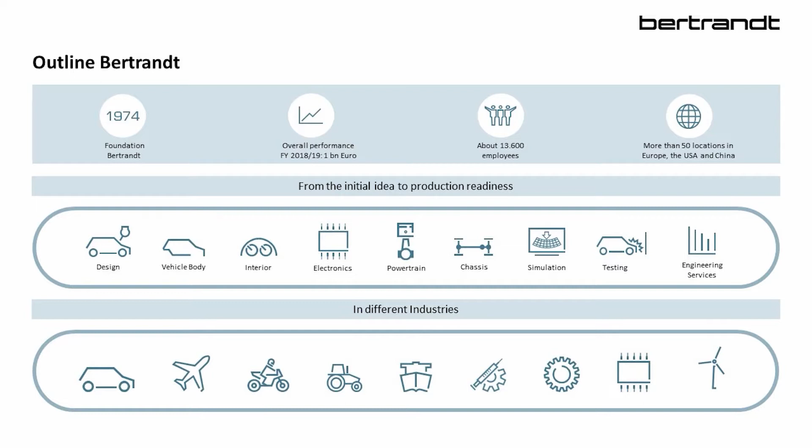And we are operating with sophisticated technologies of present and future, as you can see on our presentation slide, in different areas of the automotive, but not only the automotive industry. With our headquarters located in Ehningen, Germany, near the Stuttgart area, our more than 13,000 employees support our clients internationally from more than 50 locations in Europe, US, and China.

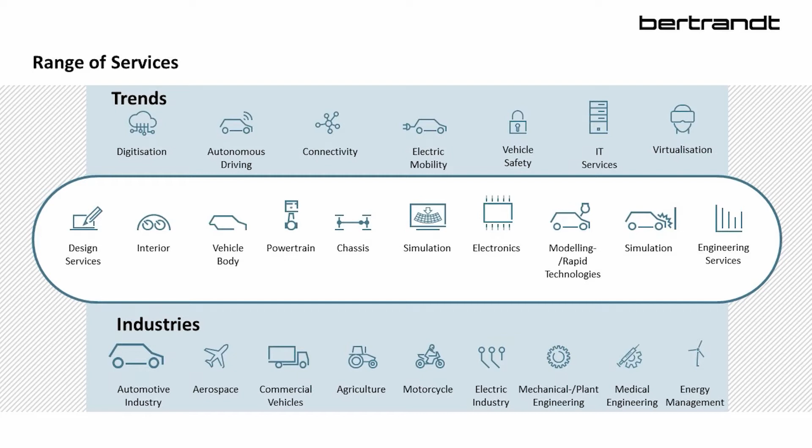We are facing increasing demands. Fewer individual projects are being awarded. There's an increasing need for development solutions along the entire automotive value chain. Development partners are expected to work on new mobility concepts for the future and to provide corresponding support for customers in their business models. We as Bertrandt accompany our clients with competence along the entire product development process in multiple domains, industries and disciplines. We identified 4 major trends that are relevant to our clients. Digitalization, autonomous driving, connectivity, and electric mobility are the megatrends that dominate the market.

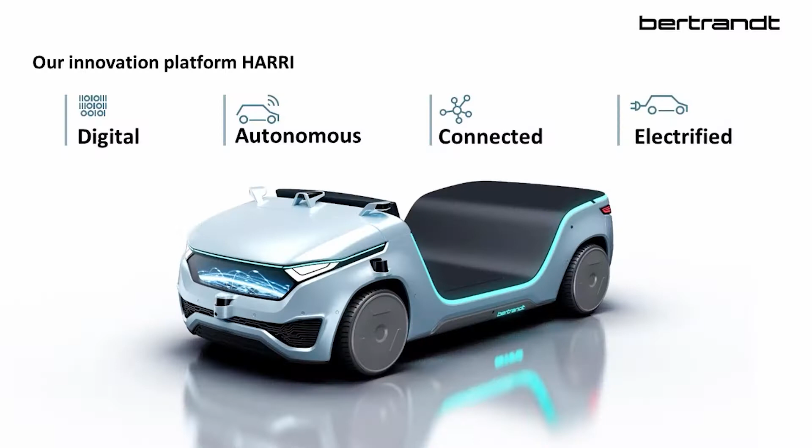As such, we wanted to find our own solution combining these major topics and invented our own development and innovation platform, HARRI. HARRI was built with a major statement in mind. Each trend on its own is an enormous challenge. The art is about mastering all 4 trends as well as linking the resulting functionalities. Thus, our innovation platform HARRI is based on holistic and interdisciplinary cooperation with participation of global branches and disciplines.

With developing HARRI, our aim was to showcase the bandwidth of our technology expertise. This does not only include the automotive industry but many other sectors as well. In this innovative technology demonstrator, Bertrandt brings together the complex interrelationships between individual divisions implemented through intelligent solutions. But let HARRI speak for itself.

I am the Intelligent Autonomous Innovation Platform, and I truly mean intelligent. Digitization, autonomous driving, connectivity, electromobility. Who doesn't know the buzzwords these days? Every trend on its own is an enormous challenge. The key is to master and integrate all four of them.

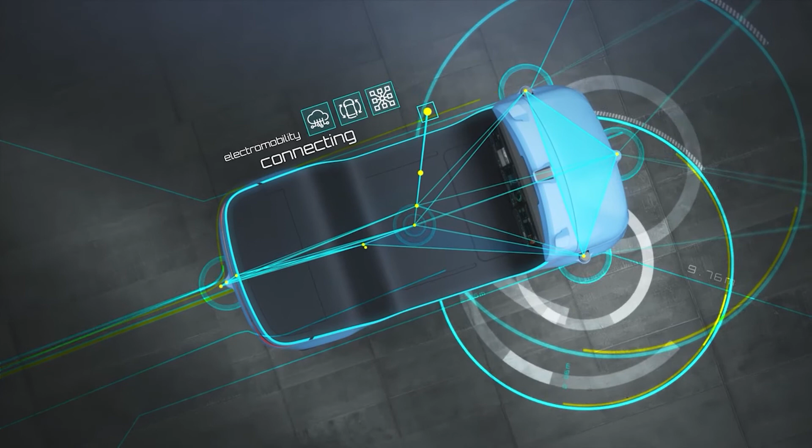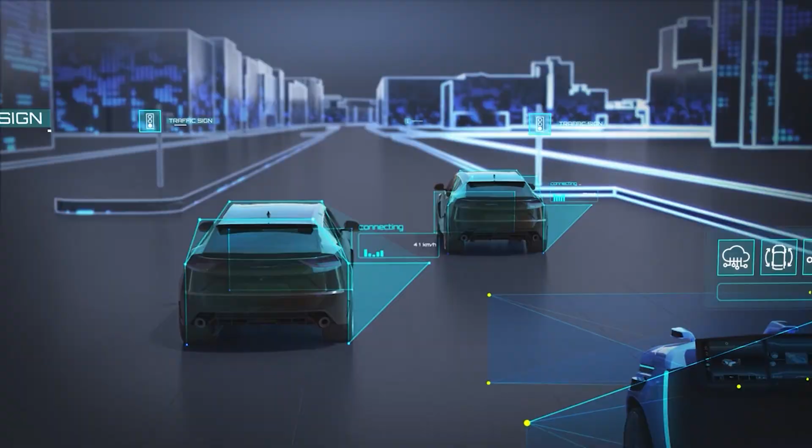I am HARRI. Thanks to intelligent solutions, I merge these megatrends of the future. It is in my DNA. The best of both worlds, the virtual and the real one. I know things. I see things. I connect myself, draw conclusions, and know where I'm heading. Of course, I do this autonomously, safely, and on my own.

The expertise of my developers is my base. The street is my playing field. And yes, nothing runs without energy. That's why my highly efficient power supply can connect with intelligent charging stations. All certified and manufacturer independent because I love freedom. The solution for automated, connected, and electric mobility? That's me, HARRI. Made by Bertrandt.

We did not only build HARRI for ourselves, but also for our clients. How we did that, some more details about HARRI itself, and how IPG CarMaker was all part of that, we will show you within the next few slides.

HARRI is equipped with self-developed algorithms using an NVIDIA Drive platform and a multitude of sensors for location, inertial measurement, and perception. To recognize the entire environment, HARRI is equipped with 4 LiDAR sensors, 16 ultrasonic sensors, and 12 cameras in total. We brought in our engineers' expertise to processing and merging that big amount of raw data in real time. The merged environment data is used for trajectory planning and to optimize the position and orientation of HARRI.

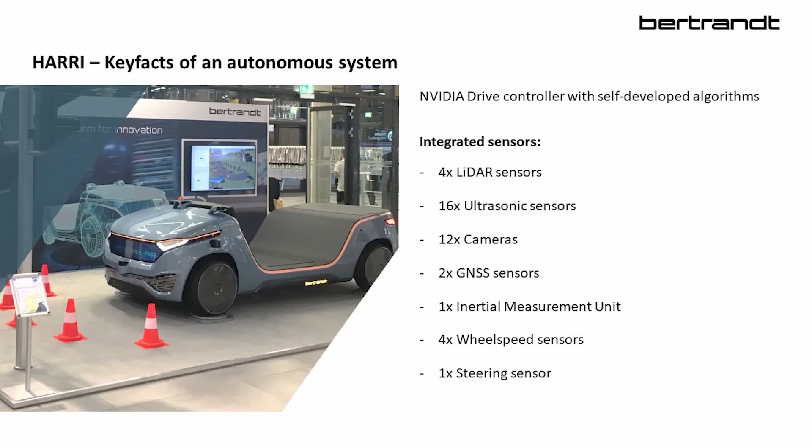During the software development for the autonomous driving functions, IPG CarMaker was used as a simulation tool and for the virtual validation of the self-driving algorithms. To enable us to show the park and charge scenario in indoor environments, for example at customer tech days or exhibition events, HARRI was connected to a CarMaker simulation. Therefore, the innovation platform was represented as a digital twin and the environment simulation was adapted to the automated valet parking scenario.

From the CarMaker simulation, all relevant sensor data is sent to the autonomous drive controller so that the development algorithms such as trajectory planning, longitudinal and lateral control, and localization can interact in a closed loop. Using the environment sensors, HARRI is able to detect and classify objects moving around the vehicle, stop signs, traffic lights, and landmarks in real time, and thus affecting the simulation.

Communication and interaction with our exhibition demonstrator can happen in real time by interacting with these sensor systems, for example blocking HARRI's vision, or in a mobile application connected to our cloud interfaces. Our cloud interface also was divided into a Bertrandt Industry Cloud for infrastructure communication and a Bertrandt Automotive Cloud for communication from car to X.

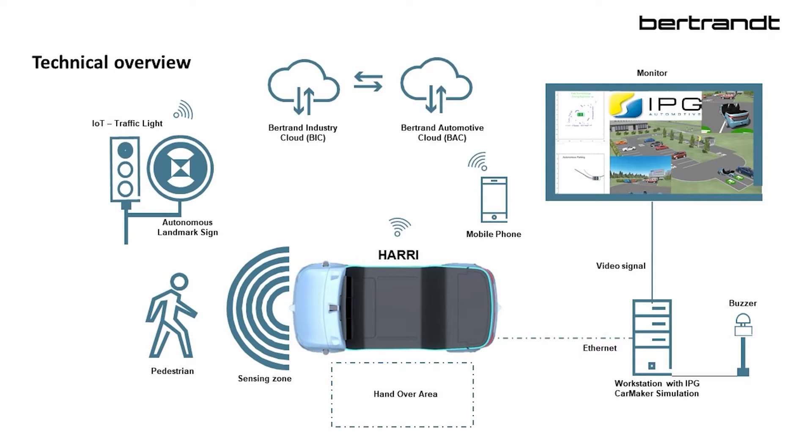All virtual representation and virtual environment was rendered in IPG CarMaker, presented interactively to our exhibition visitors on a big screen, while our physical demonstrator changed its lighting, visual signaling, steering direction, and communication information in real time. We are now going to show you the same tech demo as shown with our exhibition demonstration.

As you can see, HARRI is able to detect the traffic light situation. The driving status indicator indicates this by switching to yellow light both in virtual and at the actual physical prototype. Our camera algorithms recognize the parking sign and provide the driver with optical and acoustic feedback. So everything that you can see in the virtual world in IPG CarMaker affects the actual prototype and our exhibition both, and vice versa.

On top left, you can see the representation of sensor data that has been received as actual sensor data from our exhibition demonstrator. On the bottom left, you can see the trajectory planning and vehicle movements that have been brought in real time to our exhibition demonstrator, changing its wheel orientation in real time.

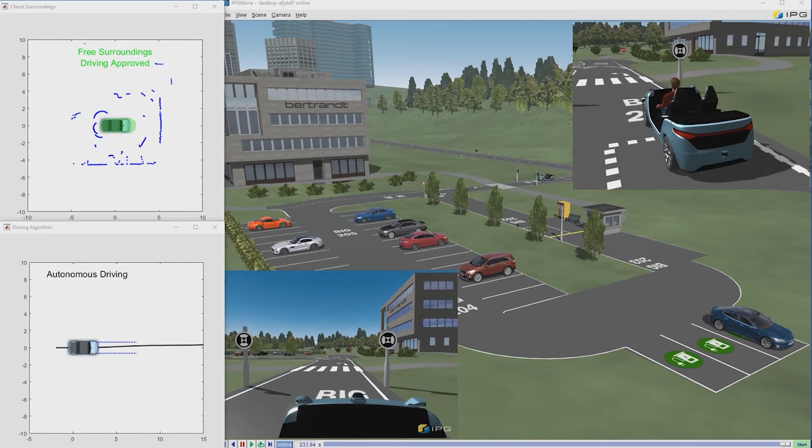As the vehicle proceeds, a landmark sign is recognized via our trained neural networks. This is used to provide and calculate a correction factor for our localization algorithms. A pre-planned route and trajectory to a handover area is transmitted via the cloud, and HARRI starts driving autonomously now.

As the vehicle starts autonomous driving, the driving status indicator changes color to turquoise to indicate autonomous driving mode. The vehicle takes over the longitudinal and lateral control, drives to the stop line traffic light, and stops. As soon as the vehicle is at standstill, the passenger is asked to disembark and the driver gets out.

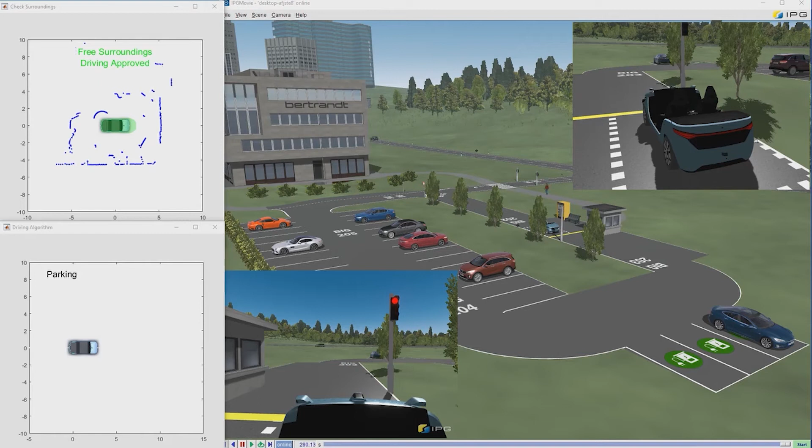The handover into full autonomy is possible as soon as the driver's smartphone app is activated within the designated area. The vehicle gets its destination from our industrial cloud and starts its journey based on transmission of a pre-route from our Automotive cloud server. After successful handshake and confirmation of planning and routing, our industrial cloud switches the traffic light color to green. HARRI detects the change in traffic light and starts autonomous driving.

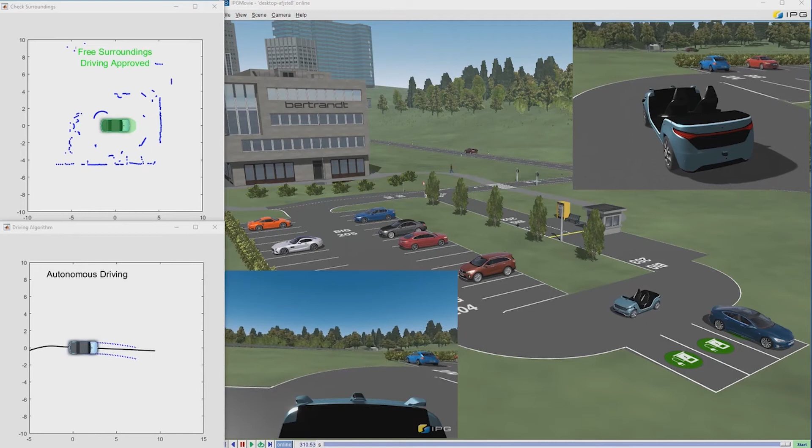As long as no obstacles are detected, autonomous driving is continued. HARRI continuously scans the environment and if objects are detected, stops. HARRI now enters the final position from the pre-route given by our Automotive cloud. After plausibility checks and free space detection, HARRI calculates a parking trajectory on its own without further information from the service. HARRI now autonomously parks while constantly monitoring the environment. After reaching the target position, HARRI automatically recharges.

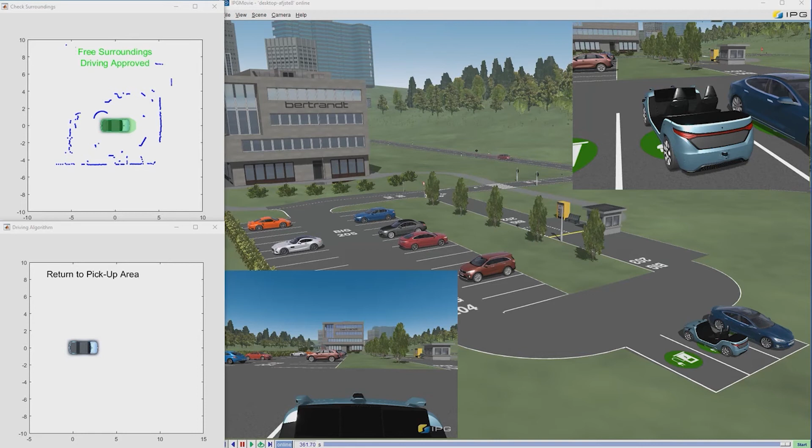As the passenger requests via our smartphone app and connection to our Automotive cloud, the vehicle returns to the transfer area. The vehicle now autonomously drives back to the passenger.

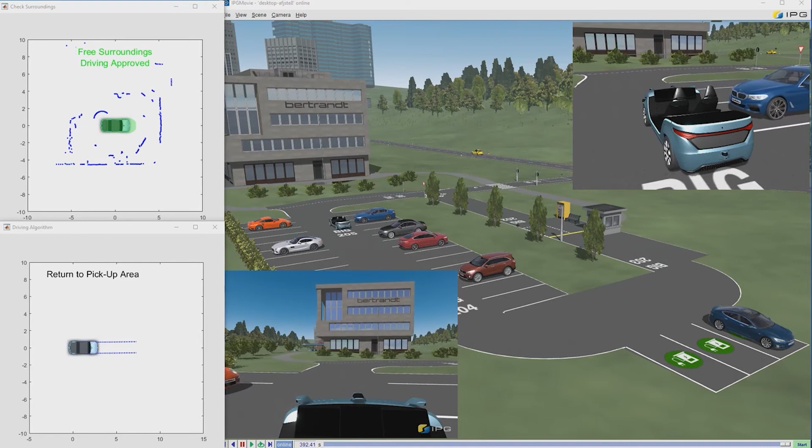After fully autonomous driving, the vehicle approaches the handover area. The driver enters and leaves the car park in manual mode. The driving status indicator changes its color back to yellow.

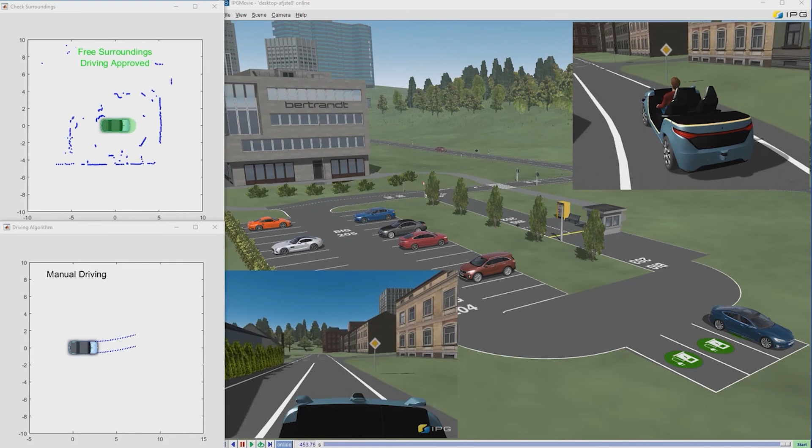As you can see, we put a lot of effort into a believable scenario that connects a virtual world and our physical prototype for both exhibition use cases and development purposes. IPG CarMaker made the effort of connecting our platform and virtual simulation simple and just working. It was fast and easy for us to adapt between different interfaces of IPG CarMaker, MathWorks MATLAB and Simulink and our own HARRI platform, all in real time and during the complete feature development.

Integration and parameterization of our vehicle models as HARRI's digital twin was simple and straightforward. Transferring our test environments and test scenarios to the virtual world helped us to quickly develop and verify our concepts and algorithms. The virtual representation of the whole scenario was visually appealing, and the support from IPG was enabling us in bringing our own platform to a virtual world easily. Running the complete scenario in a virtual and interactive world helped us test our self-driving algorithms and maneuvers.

The HARRI project extended our existing cooperation between IPG and Bertrandt and helped to build trust within our networks. We highly appreciated the overall experienced support from IPG, available at any time needed.